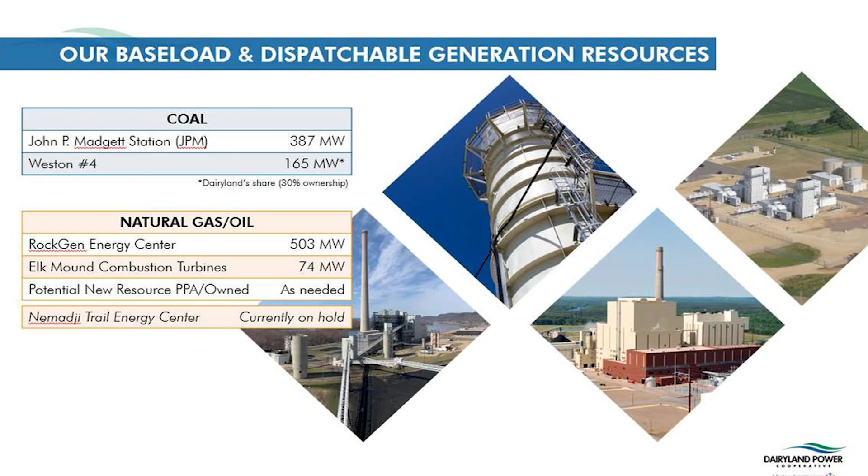What is interesting is the way the mix of the production resources is about to change in the next number of years. As you can see, there's going to be a lot more wind and solar, which has a completely different behavior from an electrical perspective, given that it's not dispatchable. You simply have to rely on when the wind is blowing and the sun is shining, as we all know. This would be a complete change in the electrical system. And why this is important, that's why I have the study that I will present a little bit later.

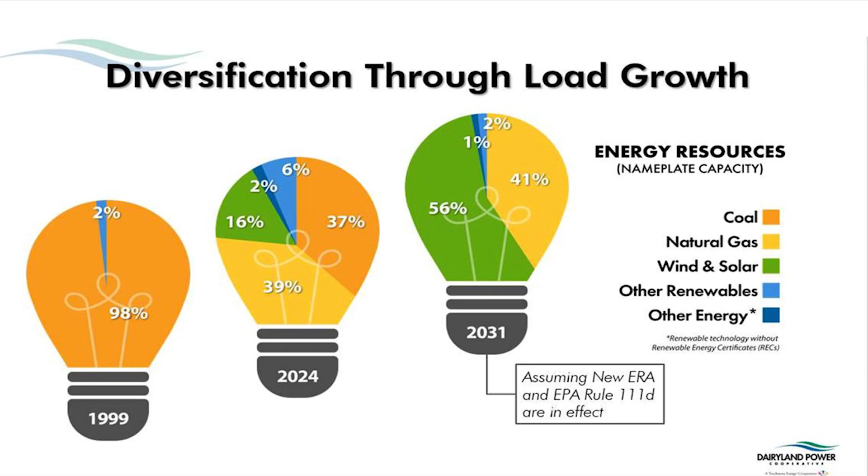Given this outlook and this future scenario, Dairyland contacted us about 3 years ago, actually, on the day. And who are Mine Storage? As a company, we're, as I mentioned, a startup starting in 2020, completely based on risk capital. So we have a cap table of about 50 different shareholders, primarily business angels and family offices, but also 2 institutional investors. One of them is originally out of the EU, a VC that now has about 150 to 180 different startup tech companies in the energy industry.

Our business idea is to take ideas such as this from the qualification phase, develop the product, build them, manage the whole construction phase, and also put them into operation and stay on as part owners of the sites.

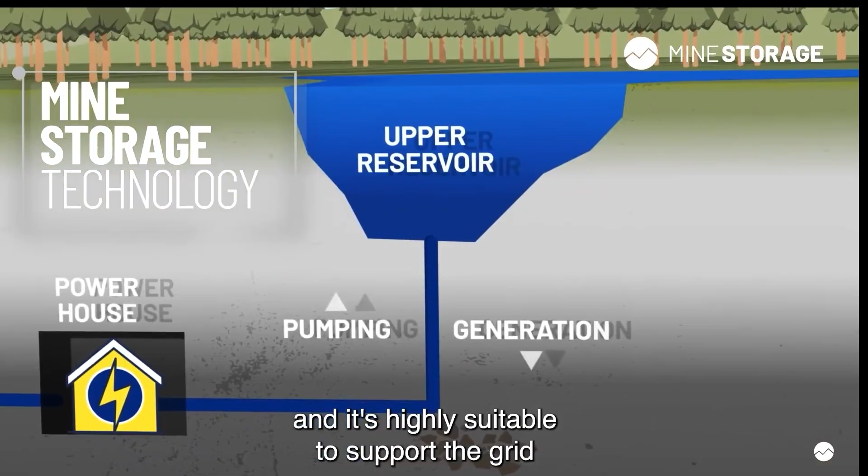And what we do is basically just putting these systems below ground and utilizing height difference below ground rather than going in mountainous areas. And there's a number of values and benefits with this. One of them is that there aren't mountains all around the world. There's a lot of countries with flat areas only.

And when we look at location of mines, there is a database of closed mines, mindat.org, which has more than 1 million abandoned or closed mines around the world. So there is a lot better distribution of mines than there is of mountains in the world. So this is a concept that actually opens up pumped storage as an energy solution compared to if we only use a traditional solution above ground.

It's also valuable to see that at closed mines you have infrastructure that can be reused, which in turn can reduce the total capex and also reduces the environmental impact. And in that context, also the regional or local aspects in terms of creating changes for the local communities.

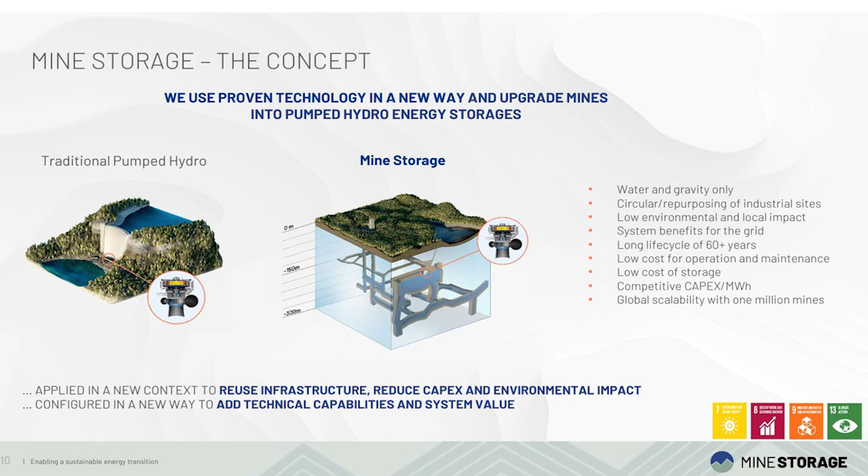We also look at the machine configuration. My thinking was not to go into that in detail, but we have slightly different setups of the machines so that we can also add technical capabilities and additional system value from an electrical perspective. But if someone is curious about that, I'll get into that in the Q&A. So that is the principal concept.

And before getting into the system study and also our products, I just wanted to mention what was presented by McKinsey not too long ago, when they looked at the global need for energy storage by 2040. Their estimate is that there's a need for 140 terawatt hours of energy storage around the world. And that's quite a difficult number to comprehend. But if you compare that to Tesla cars, that would be 1.5 billion Tesla cars.

And that amount of energy is the same amount of energy that Sweden would consume as a country over a full year. And where are we today? We're at 10 terawatt hours today. So there is another 13 or 14 times that we need to add in the next 15 years. And more than 90% of those 10 terawatt hours are out of pumped storage facilities around the world, and only about 4%, 0.4 terawatt hours, is based on batteries.

So even though there is a boom of battery installations around the world today, it's still a very small portion of the total storage capability, and also a very small part of what's needed, if we can trust the analysis and the studies done by McKinsey, which I think we should. So that's a little bit of the introduction and the background and where we come from as a company.

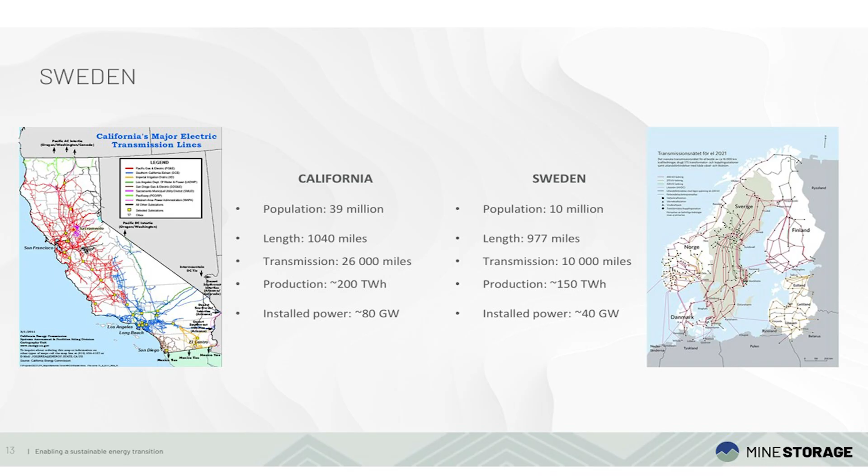Sweden is also a very small country, as you understand, from a GDP point of view, but as such still has the tradition of some very classic companies in the traditional industries like metals and mining, pulp and paper, forest, and also machinery and automotive. Some of these brand names I'm sure you recognize.

We also have about 80% of the European iron ore deposits, and that's where LKAB comes in, which is the state-owned mining company. We're also the fourth largest exporter of forest industry products in the world. And according to at least our companies here, Volvo and Scania, they are number one and two in the world in terms of supplying heavy trucks. So there's a number of companies that are in the forefront globally.

From an electrical point of view, we have been fortunate that we've had a mix that is really cost competitive and also very reliable, which has been one of the key success factors for the industry in Sweden. This goes back to the 70s - before the 70s, basically all the power production was based on hydropower. Then from the middle of the 70s into the middle of the 80s, we had our era of construction of nuclear power plants.

Since the middle of the 80s up until now, basically half of the production has been hydro and the other half has been nuclear power. So really a system where the base load and dispatchable load from a longer perspective is nuclear, and also the hydropower resources where you have excellent controllability to make sure your system is not only long-term stable, but also stable in a short perspective in terms of frequency regulation.

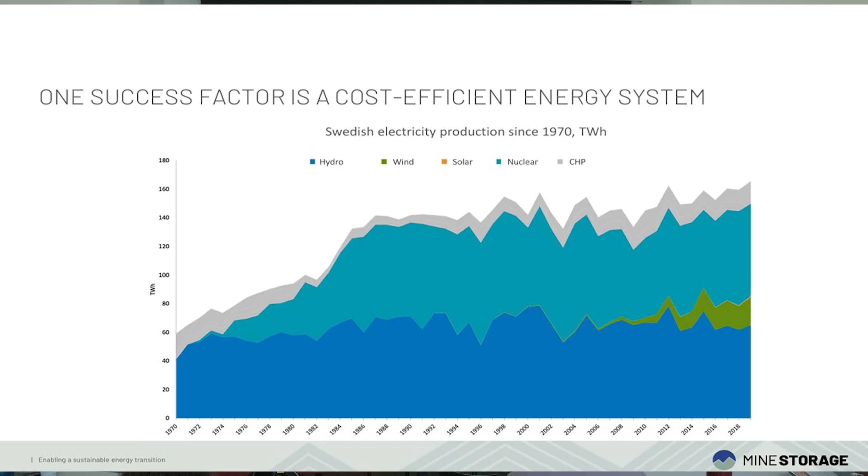But things change, and we all know that we are now looking at how we can phase out fossil fuels. Sweden is a small country, but several of the companies here are global, international, and are aiming to stay in the forefront. If we look at the industry and the impact on the climate, many of these companies have observed their impact on the climate in terms of emissions, and also want to be in the forefront going forward.

Some of these companies - LKAB I mentioned is a mining company, and Hybrit and Stegra are two companies now aiming to produce fossil-free green steel. SMA Mineral is a cement company, also with a high portion of CO2 emissions in their production. And Volvo Trucks is a company aiming to reduce their CO2 footprint to the maximum possible.

In addition to those classic industry companies, we're also having some companies that are global and well known by you, like Microsoft, Facebook, and Amazon, who have located some of their data centers in Sweden and in the Nordics for some reasons, one being that there is renewable and fossil-free electricity production that they see as a value in their aim for a fossil-free and completely CO2-free footprint. But we're also having a couple of companies in the energy area aiming to introduce production of hydrogen for future solutions into industry and transportation, which are really high consumers of electricity.

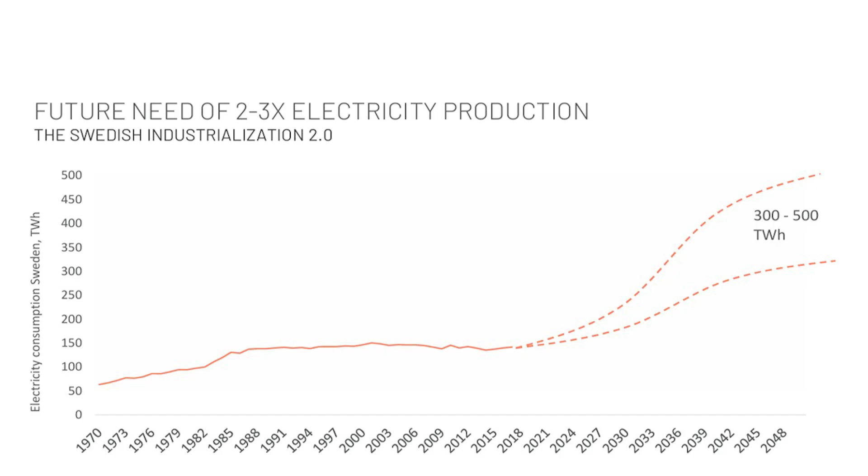One of the aspects we wanted to look at in this study was to compare a couple of different scenarios for how to solve this. If the industry and society will need us to add production capability of 2 to 3 times today's level, how will that be solved? The Swedish Transmission System Operator, the TSO, developed a couple of scenarios that we investigated. This is a summary of 2 of them. In these scenarios, we're starting off with 40 gigawatts of installed capacity and about 150 terawatt hours of energy consumption and production.

But the key element I'll come to later in the study is what we also saw: a completely new mix, with a lot less hydro and nuclear. In our case we basically have no coal, but we have combined heat and power, CHP, because a lot of cities in Sweden are heated by district heating from CHP plants. Those have been very reliable as part of the electrical system mix, but going forward that would be quite a small portion of the total rotating mass in the grid. In both cases, the most significant increase in power production will come from onshore wind, also quite a significant portion of the electricity produced over the year.

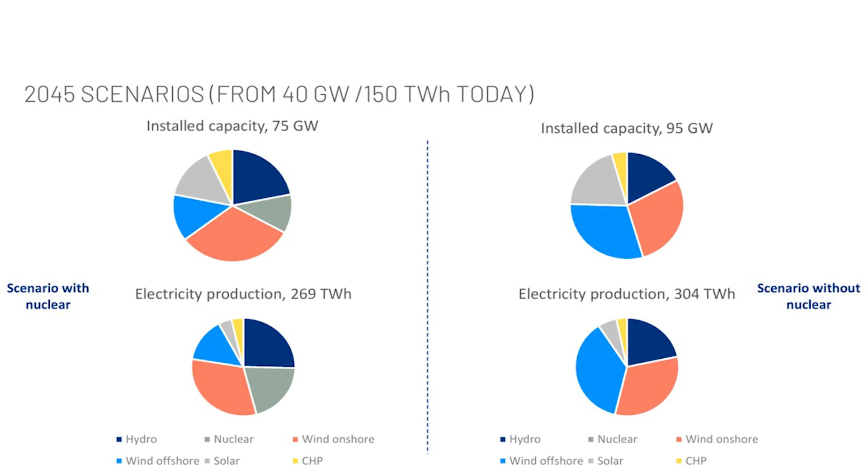But looking at that is not enough. The core of the study was actually to see, with these two scenarios, what amount of long duration energy storage would be needed. To really take that question to the next level, we said weather is very crucial in this—obviously from the solar and wind perspective, but also in a country like Sweden, weather actually influences consumption needs, both on a seasonal level and day and night.

And that is the error that typically hydropower in Sweden has been solving. And that is possible if the hydropower resource is significant enough in terms of the discrepancy between the two.

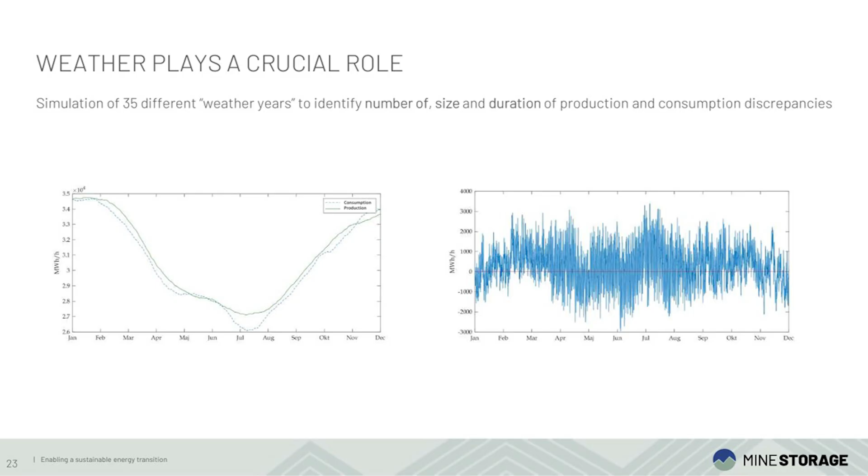So from an analysis point of view, we only looked at the deficits - when is the consumption need higher than the production plan from the systems? We can see that those situations are more than hundreds of events on an annual basis, and they're quite long also in terms of hours, so even a couple hundred hours of duration for a single event.

And even more interesting is that most people believe that with nuclear, we would solve the problem, but that's not the case - basically the deficit patterns will be very similar. The simple explanation is that nuclear is a very plannable resource, but it's typically not used as a controllable resource like hydropower, which means that if there's discrepancy between production and consumption, to my knowledge only France is using their nuclear power plants for controlling and compensating for that discrepancy. So nuclear, the way Sweden has been using it and most other parts of the world, is not a suitable solution for controllability.

And then, because this was a thesis work for two engineering graduates at master's level, we also emphasized the need for taking an engineering approach on the result. There were two aspects. We didn't want to have a result that didn't count on there being other technical solutions in the future. So for flexibility, we said we don't want to assume exactly what type of flexibility resource there will be in the future, so far away from today. But we can count on there being different types, everything from vehicle to grid, utilizing car batteries, to flexible loads that are prepared to disconnect if they get paid for that, etc.

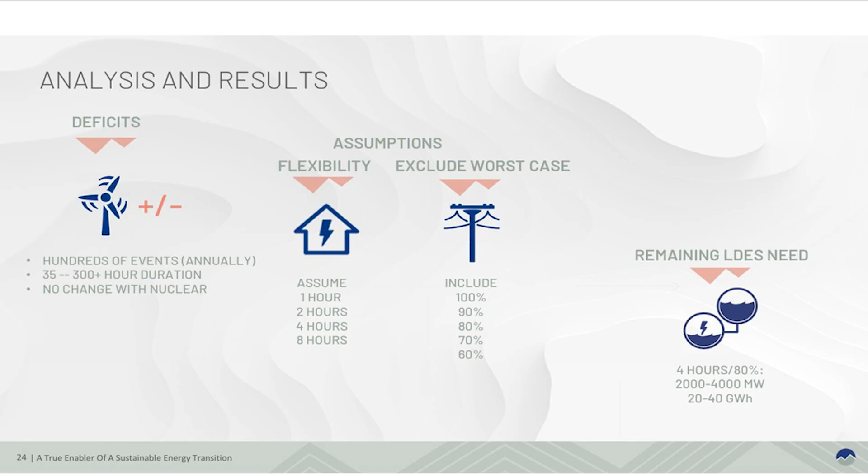So that was the rough summary, regardless of which type of mix we will have in Sweden in the future. And also in Europe, we've separated grid operation from production of electricity, so we have a slight challenge in terms of market design, since it's divided, and it's a little bit more tricky for us to see who is really in charge of this. So we are lacking some of the market designs for managing this future dilemma. It's a society challenge, but who picks up the bill or who gets paid for solving the problem?

I realized I should mention - because I think what's even more important for you is actually our projects.

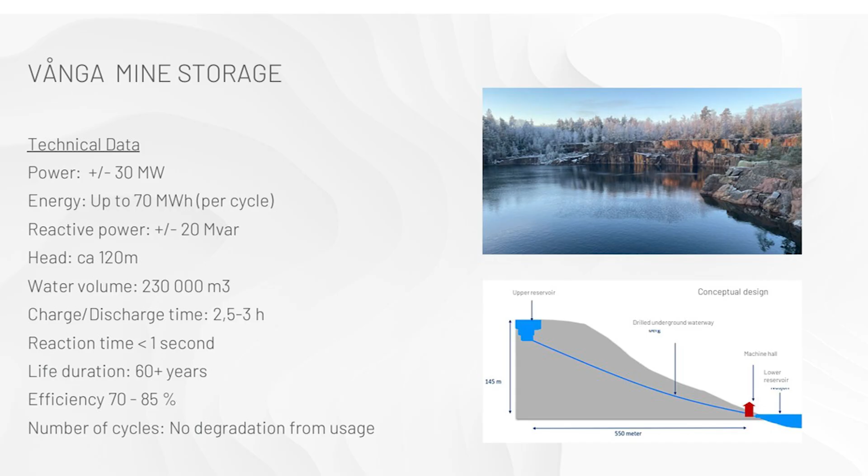And we get about 70 megawatt hours in this project. And as you can see, we have the height difference of about 140 meters, only with a distance of about 600 meters. It's really an ideal location for a cost-efficient solution, and we're able to utilize very much existing infrastructure.

And this is truly in a mining environment. And this is in the area of Norberg. And for those of you who are looking at historical sites, I think Norberg is probably getting on the list. I don't know exactly how many centuries of mining operation there have been, but there are several centuries. One of the really oldest parts of Europe where mining has been. But unfortunately, in the 80s, all the mining activities were closed.

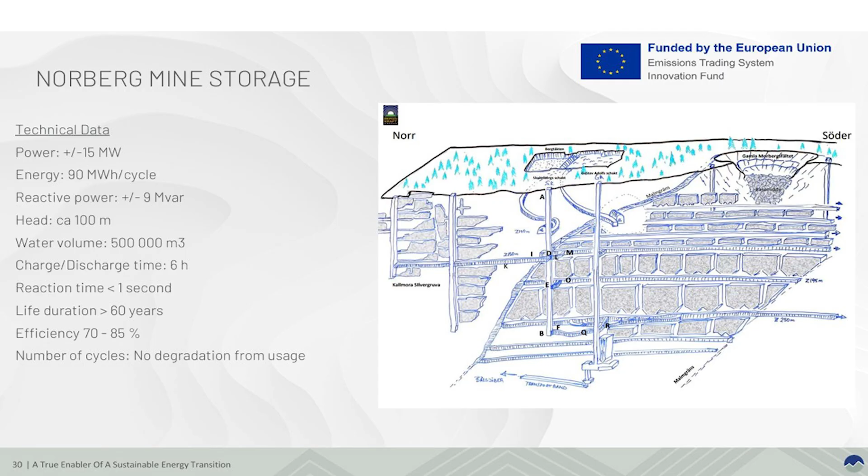We also, together with the knowledge of MTU, did a number of different types of commercial or financial analysis of energy storage in the region, because the rules and the regulations are completely different in the US compared to Europe, and also you have quite different conditions in different parts of the US. So this was definitely a main contribution from the team from Dareland. And that is just a quick example of the way that we work.